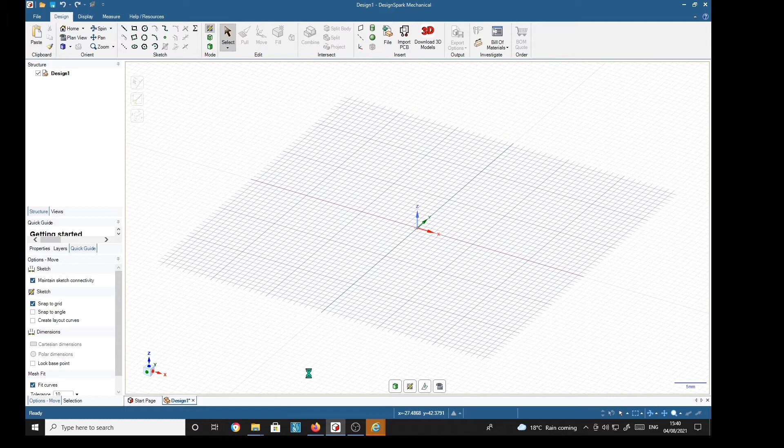The first part of the x-axis is the subassembly, and all the parts are here. If we hold down the control key, we can select them all, but we don't select the subassembly itself because that's what we're going to make - it's a sleeper key, low rail, linear mount, and the x-axis rail. And there it is. H key to show them all.

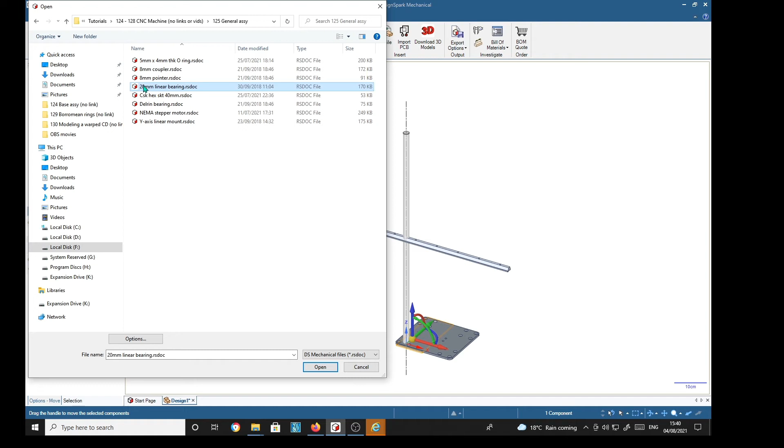Now there is one thing missing, and that is the linear bearing for the rail here. The linear bearing is common to all three axes, so that is located in the general assembly, and there it is, 20mm linear bearing. So we're going to load that. Also, there it is, linear bearing.

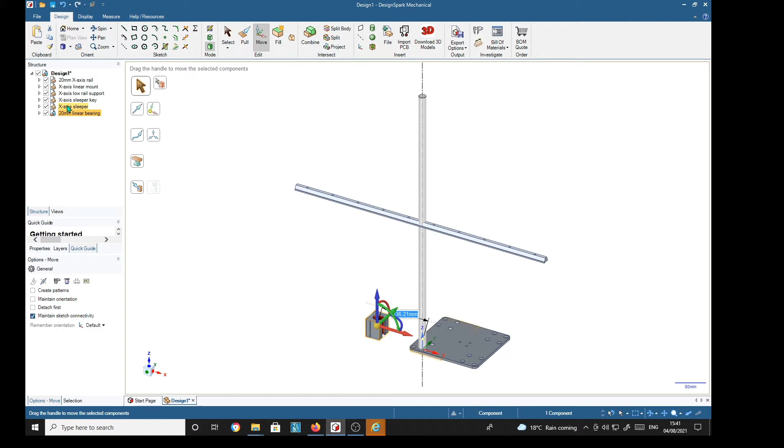Now we have everything we need. I'm going to move them separate from each other. There's the x-axis sleeper buried in there somewhere. We'll move it out. Sleeper key, that is again buried somewhere. There it is.

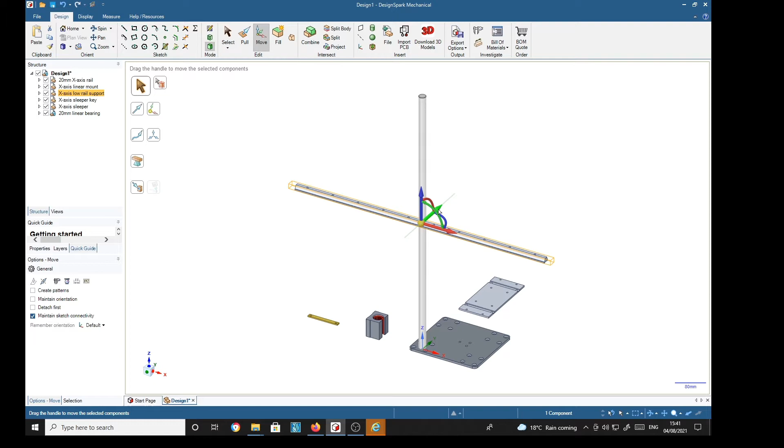Low rail support. Linear mount down here. And the x-axis rail, which is in the wrong orientation, so we'll change that - move that to 90 degrees. Right now we've got all our parts clearly to be seen.

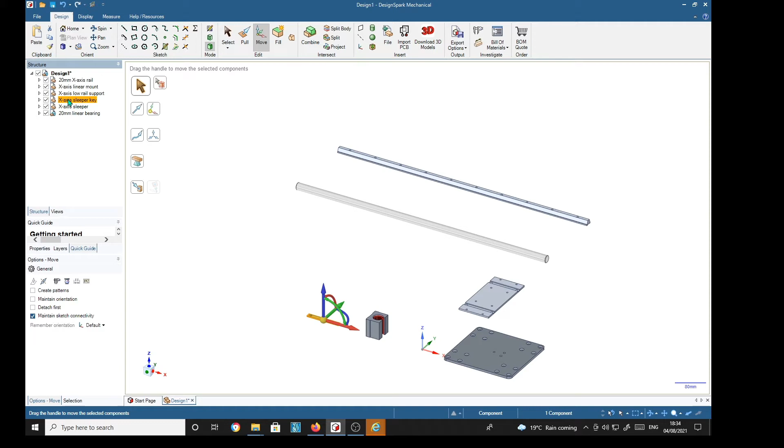Now that we've got all the parts, we're going to assemble them. First thing we're going to do is put one of these keys into a slot over here. So hover on there, we'll see that it's this sleeper key here in the structure tree. So if we zoom in...

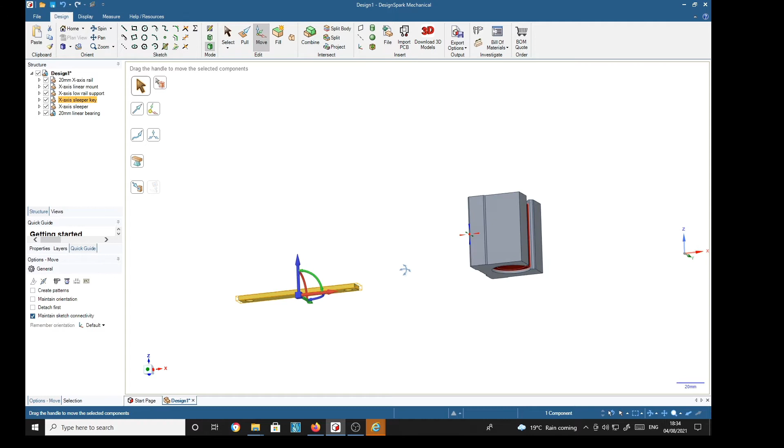The first thing I'm going to do is place the anchor handle on the bottom face. Then we go to the sleeper, choose the up to tool and select this bottom face of the slot. Now I've just clicked, and that will have put the bottom face of the key level with the bottom face of the slot.

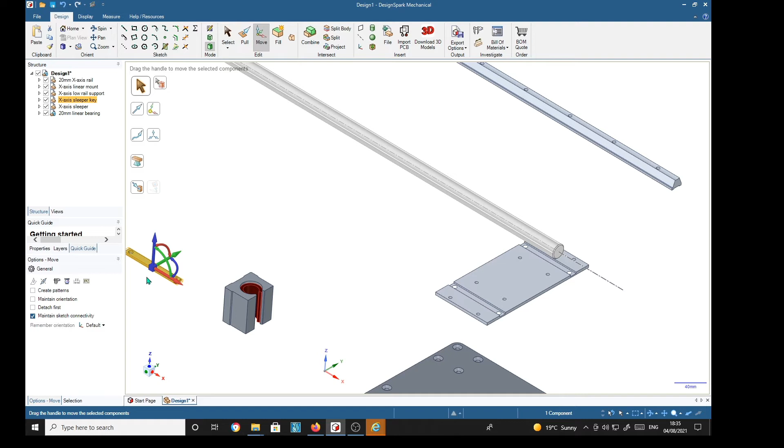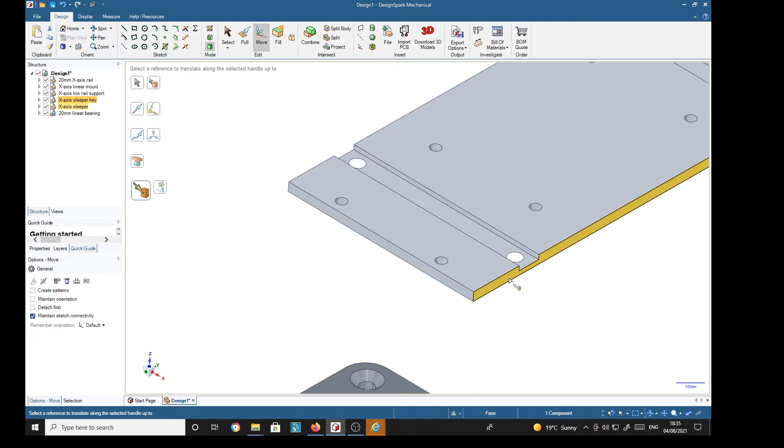Now the next thing I can do is drag the handle to the end. Select the blue arrow and the up to tool. Click on here, and look, it's shifted it right across. So now we've got the bottom face level with the bottom of the slot, and the end level with the edge of the sleeper.

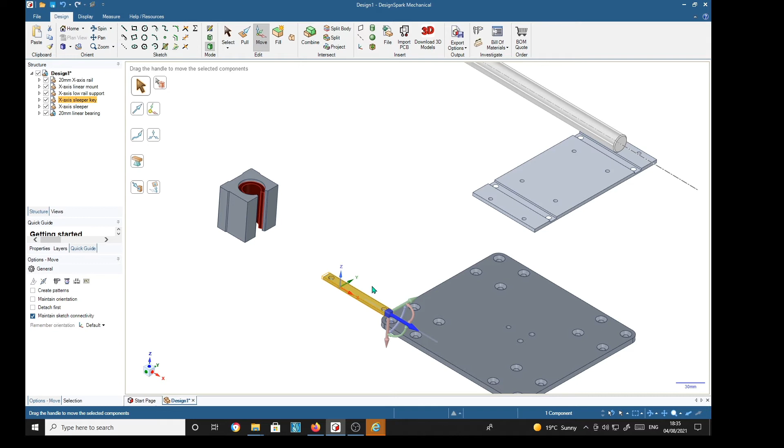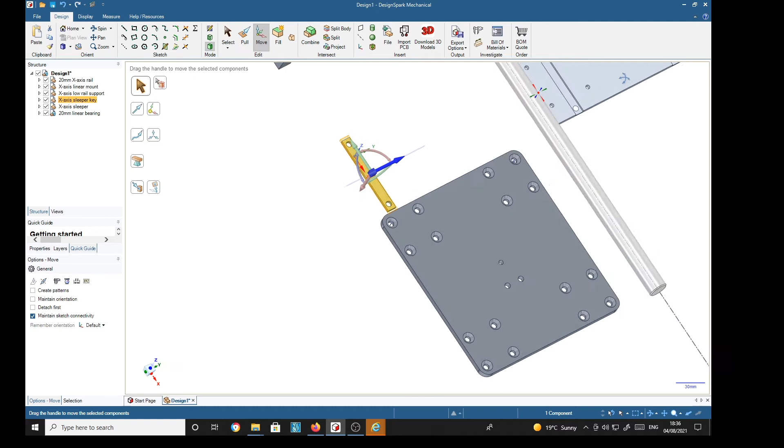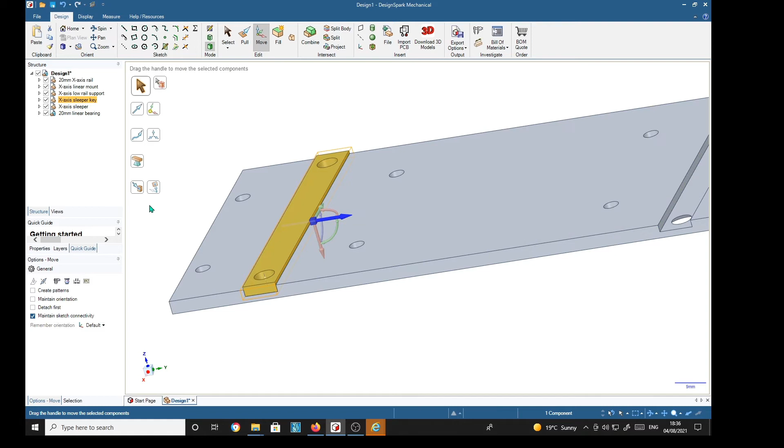Now all we have to do is place the hub on this face there, select the blue, and up to this face here, and there it is, perfectly fitted into the slot. Now we've got one in while its anchor is on that edge. We can select it, select the up to tool, hold the control key down and select this inside edge, and we get another one fitted into the other slot.

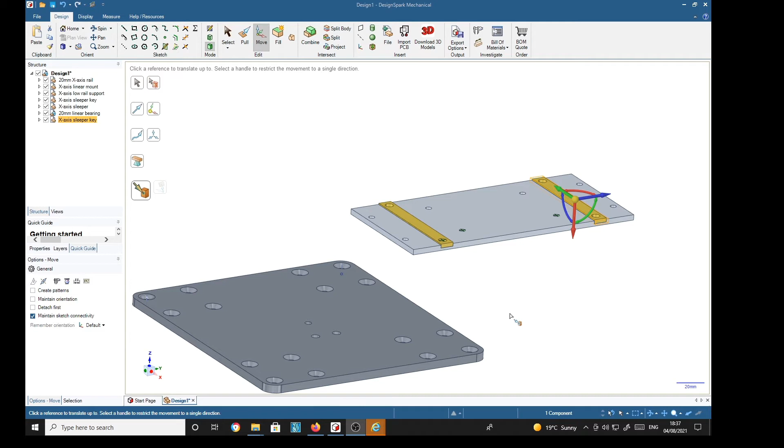The next part of the procedure is to assemble the low rail onto these keys. You see that there's a slot in the underside of the rail which fits exactly over the key.

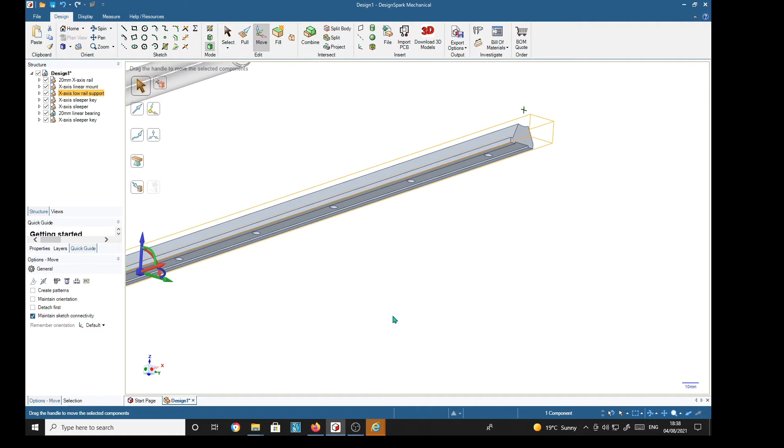So the first thing we'll do to achieve this is select this low rail which goes over there and drag the hub onto the underface there. Select the blue arrow, up to...

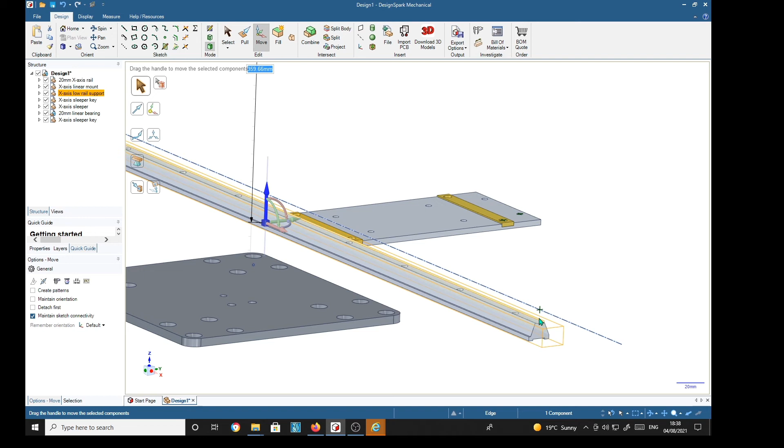Now that's put the underface there level with that one, that face. Now the next action is going to be to align this end hole with that end hole there. Now we can't really do it very well on the top because of this curve, so I'm going to turn it over, move the hub to that hole there, and it's in the middle.

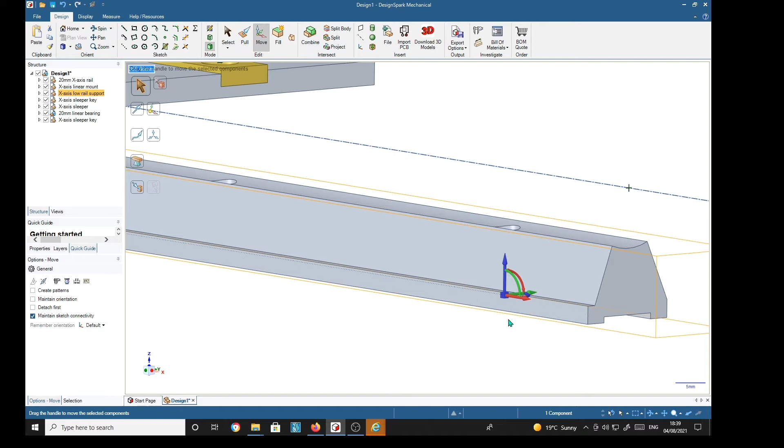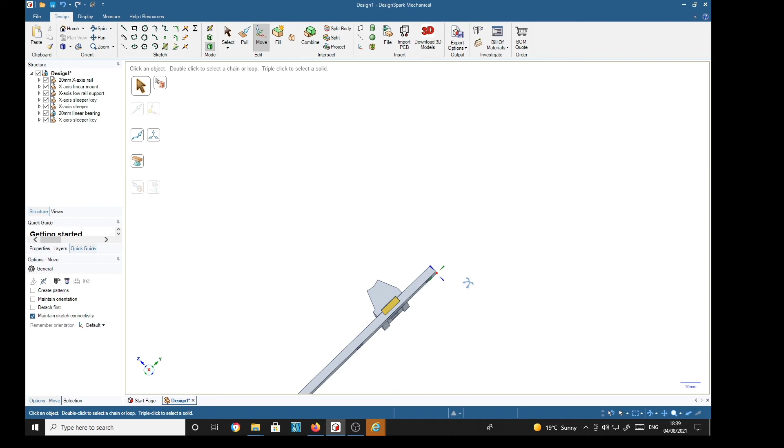Select the red arrow, up to there, and there it is, aligned on the key. And it's perfectly in line with the hole.

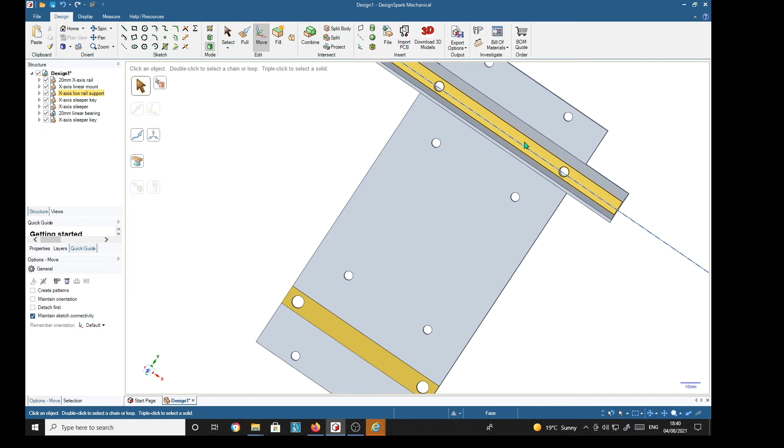Now that we've got one low rail accurately placed, we can easily make another. So we'll drag this... where are we?

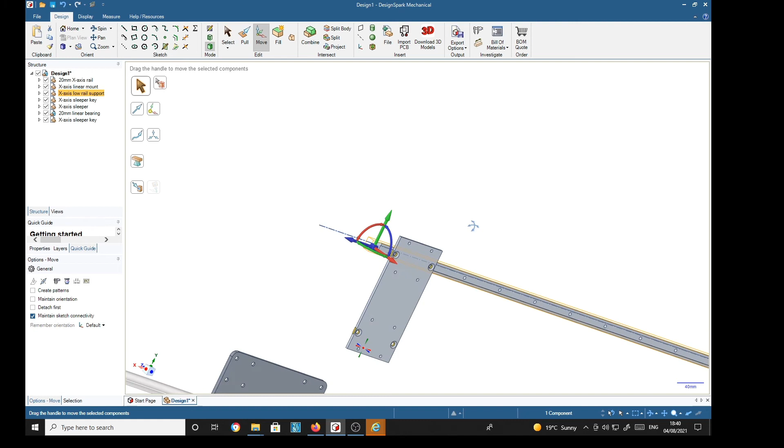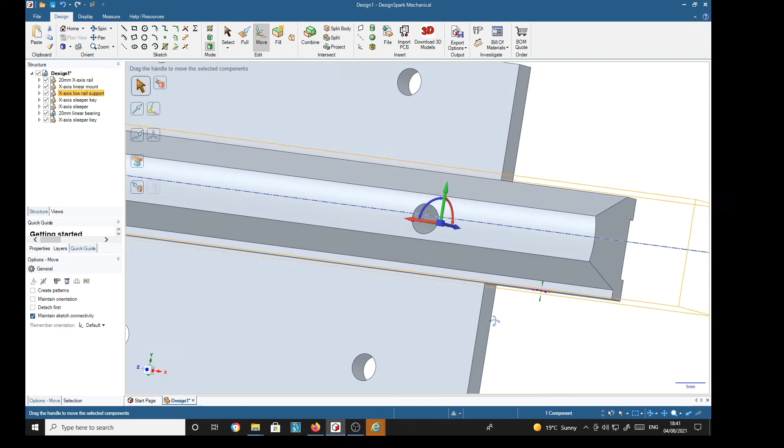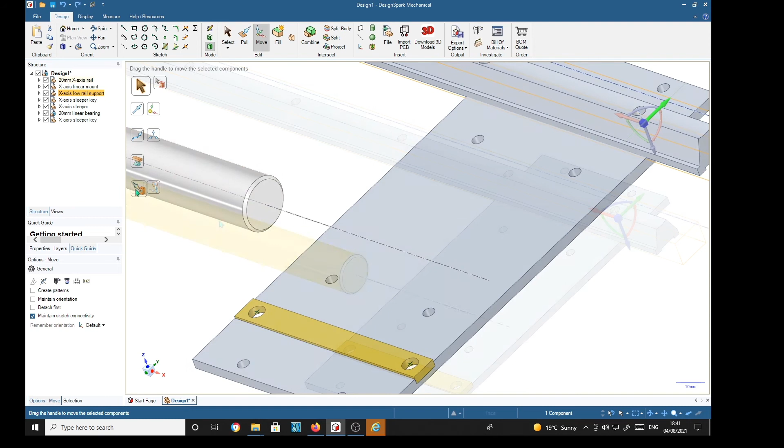Right, now we've put the anchor on the center line of one of the holes. It's inside the low rail, but we can still accurately move it by selecting the green arrow, then hold the control key, select the inside of the hole, and there we are, we've got two rails on.

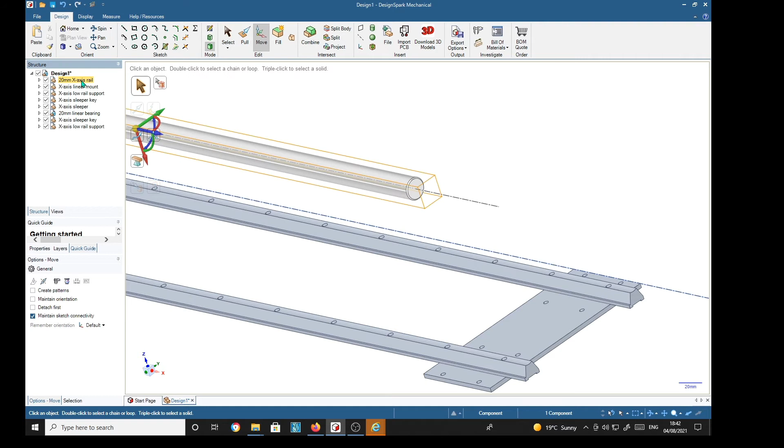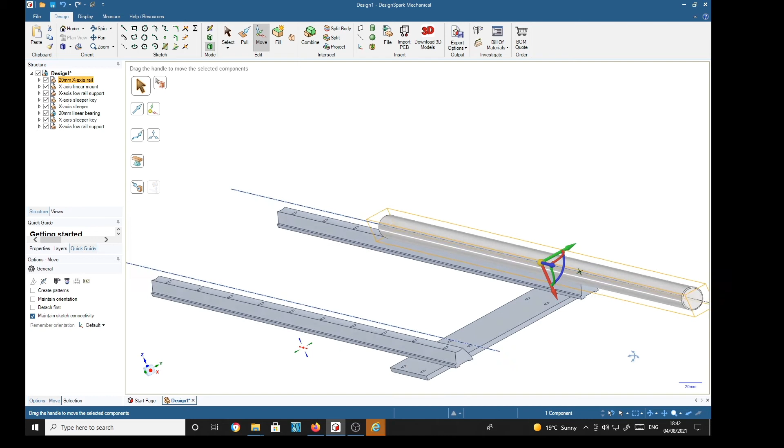Now we can move the x-axis rail. We've selected the outside surface, so that means we're on the axis, the center line of the rod. We're going to go up to the center line of this curve, so we can select that, and it's nicely on the low rail.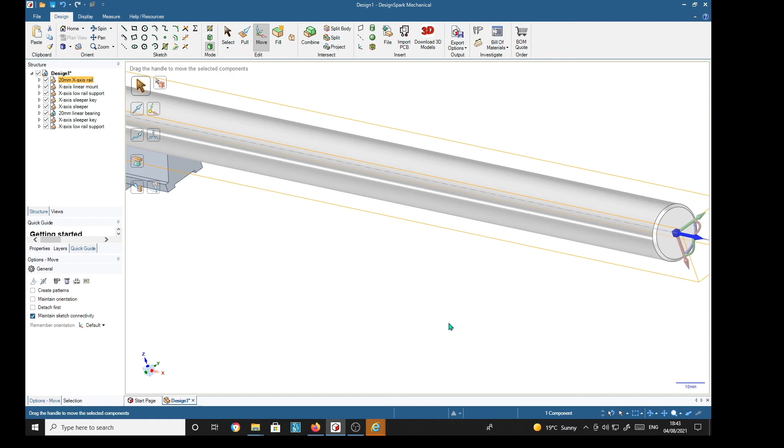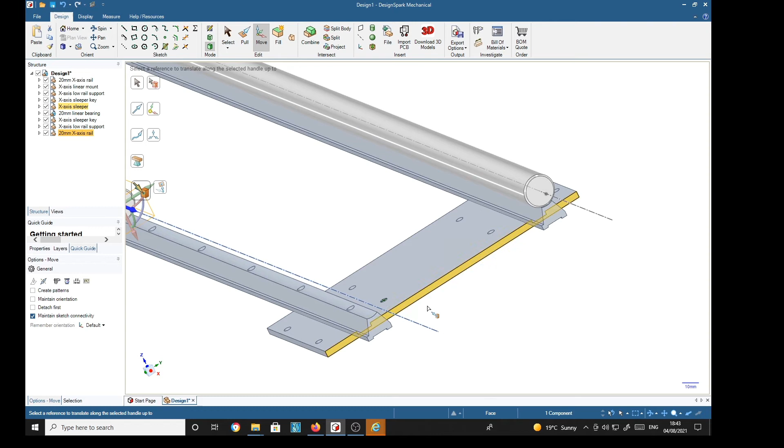Select it again, move it to the end face, blue arrow up to, and now we can go up to, hold the control key, this curved face, click. Oh, what happened? It moved the center to there, so select, whoops.

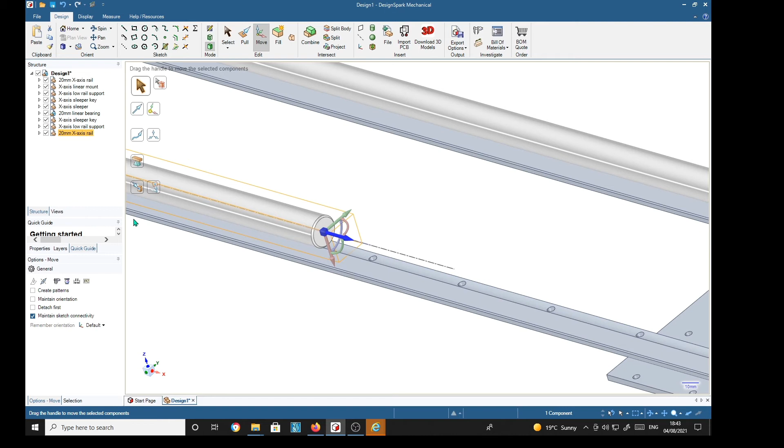Put that on the end, select the blue arrow, up to, and now we've got those rails and supports added.

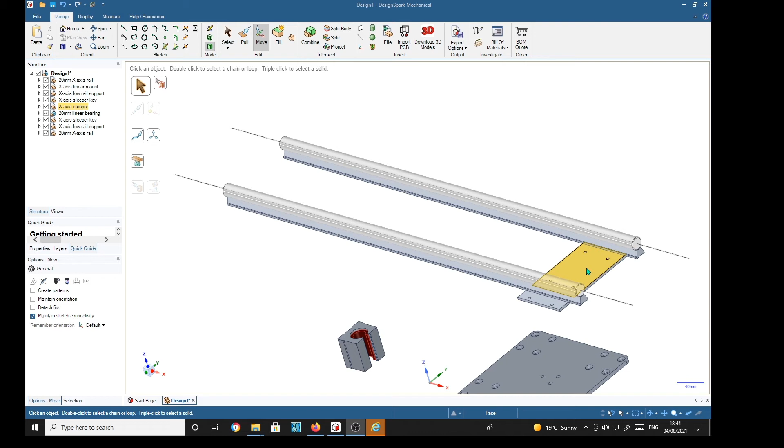Now we need 4 more of these plates, x-axis sleepers I call them. So I'm going to add them with the pattern along here. So we'll select that one, sleeper, we'll select create patterns, and up to.

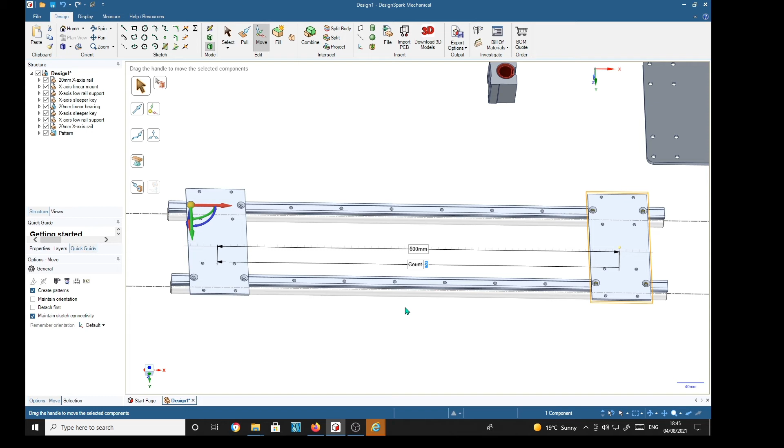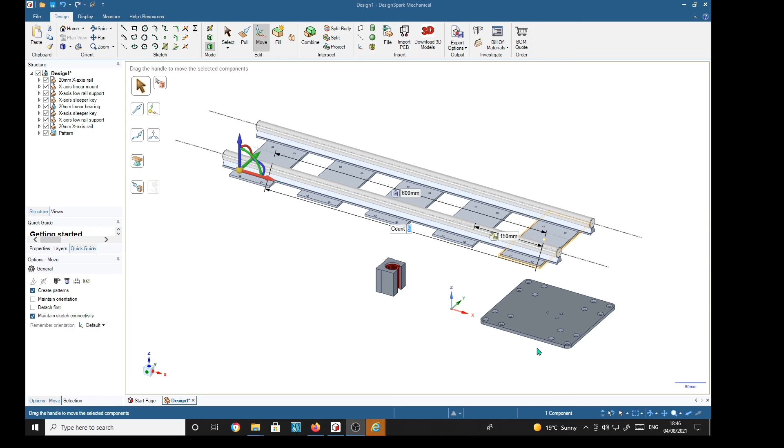Now we need to assemble 4 of these on this plate, on the underside of the plate. I'm going to turn that upside down. This is in the wrong orientation, so I'm going to choose it. I'm going to rotate it 90.

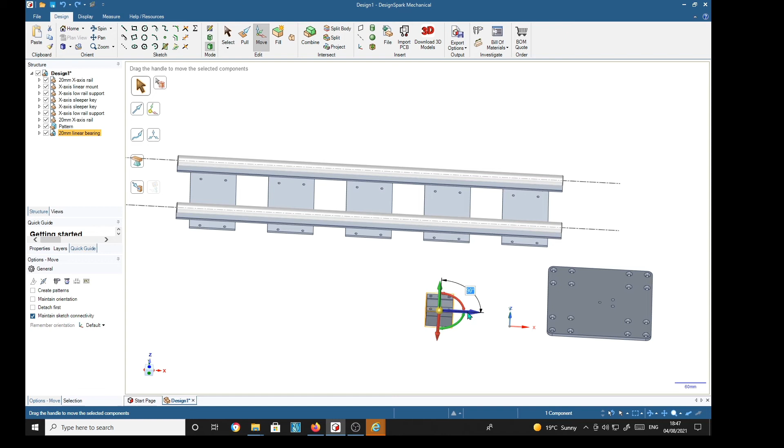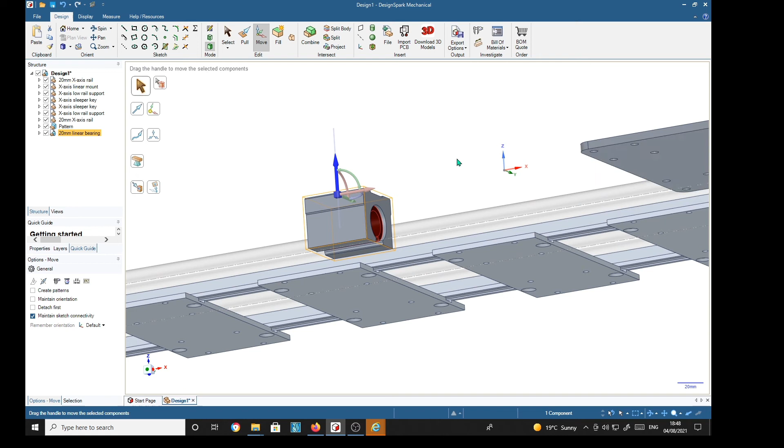And pop that on top of the bearing. Select the blue up to there, so that's put that top level with the underside of the linear mount.

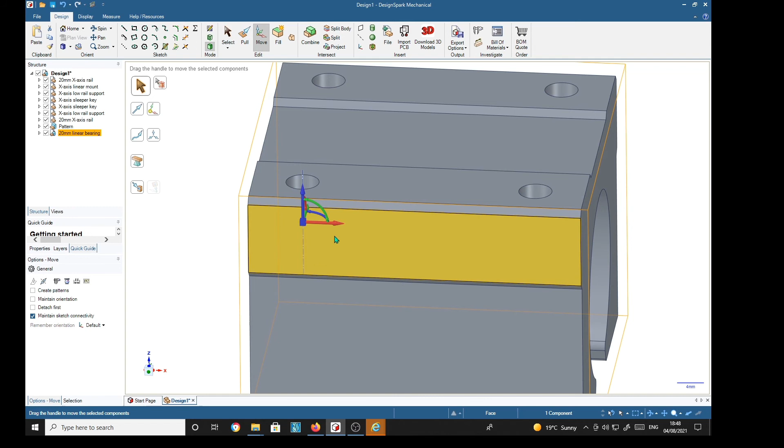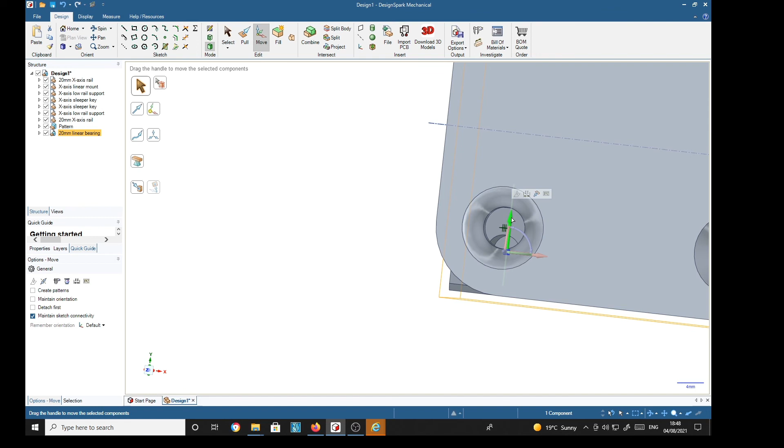Then we'll put the hub into the center of that hole there, corner hole, and up to, that's it.

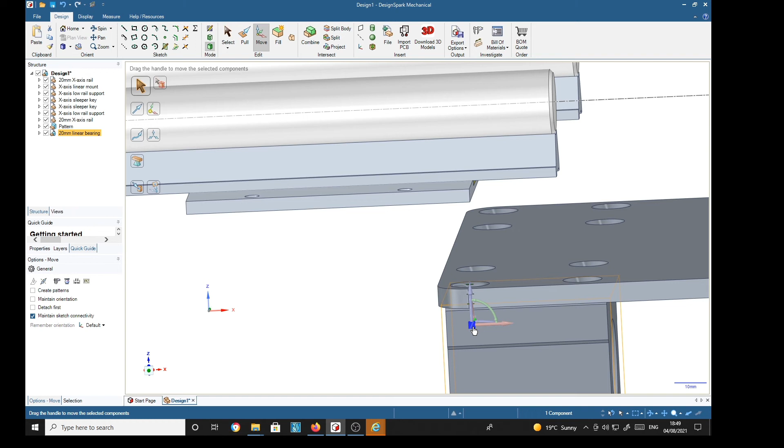Now that we've got one in there with this anchor in the center of that fixing hole, we can duplicate it by going up to control key, select that, and there we've got 2.

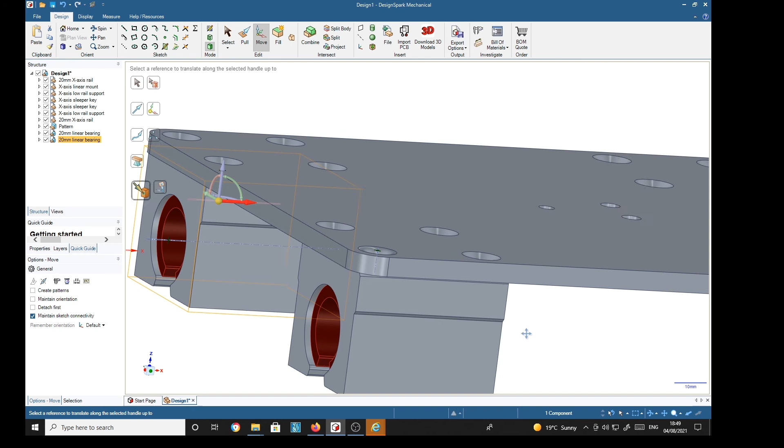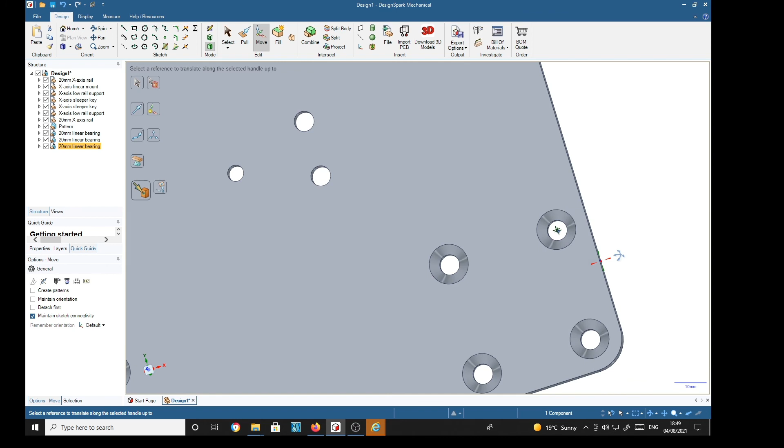Then we can do the same thing, select that one, up to, control key, click, there's another one. Click the green arrow, then up to, control, click.

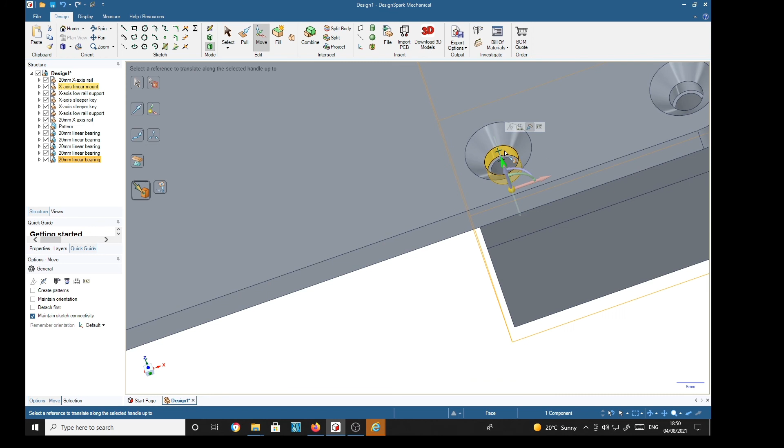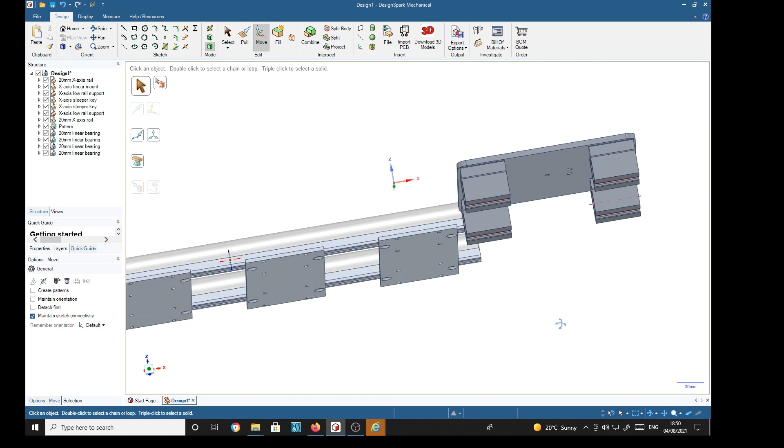Now I chose the wrong hole to go to, so we'll do that again. This time, right. Got an extra one, that one, so I can right click that one and delete it. So there is our linear mount with the 4 linear bearings.

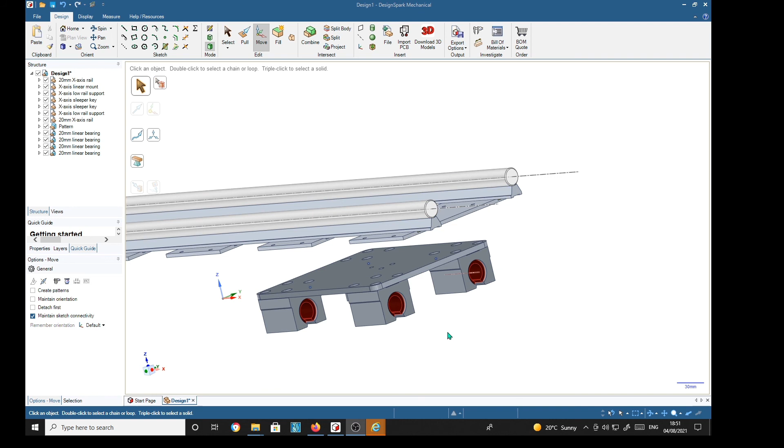The next job is to locate this precisely on the shafts, and if all the measurements are correct, it'll line up perfectly. So we've got to capture the whole thing. We'll go into select, S for select, capture it all, there we are.

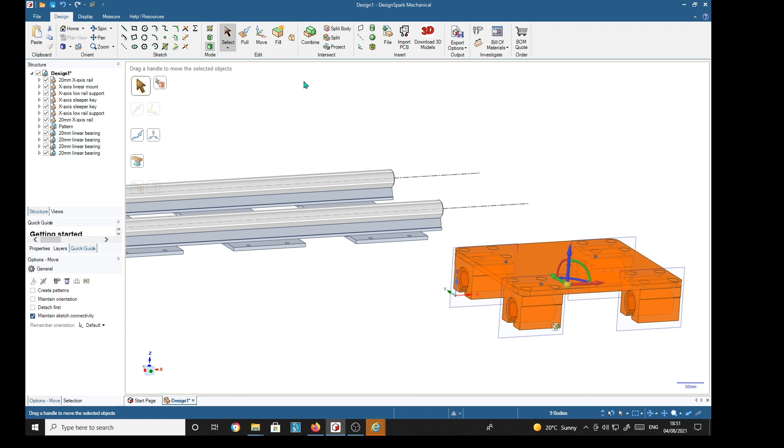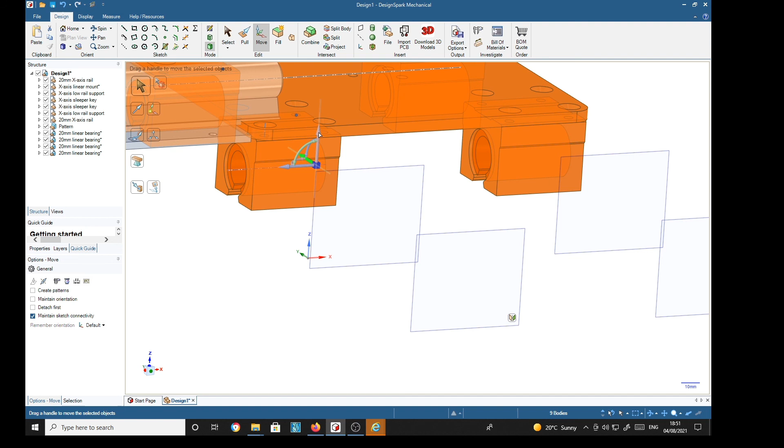Then we want the move tool, move it, move the hub to the inside of this bore, select the green, and move up to the shaft. Then the red one up to this shaft again, and we should now have this exactly on the shafts.

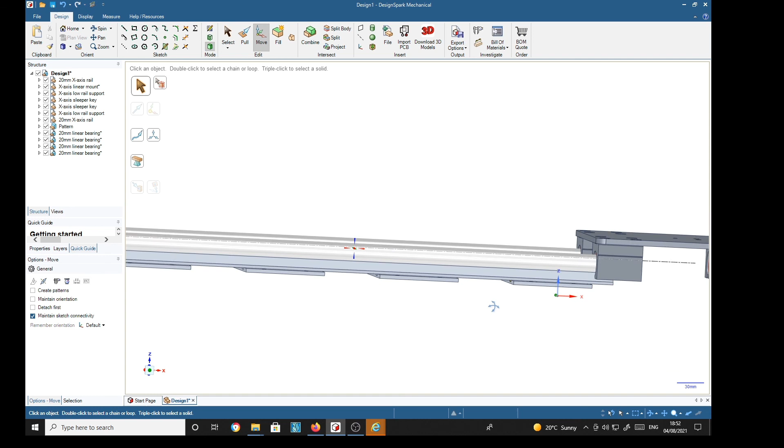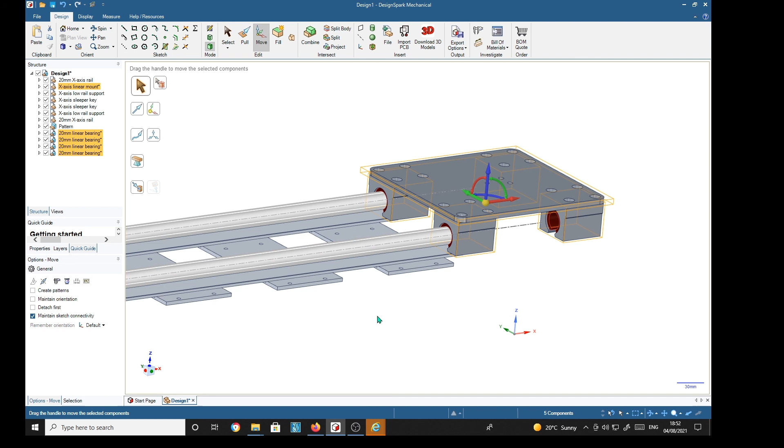It's not quite all on, so I would capture the whole lot again. Hopefully we won't capture anything we don't need to. It appears we have. So we want the linear mount, and we want the 4 linear bearings. Control click, 1, 2, 3, 4. Now we've got the whole thing captured, 4 linear bearings and the linear mount. There's nothing else in this part.

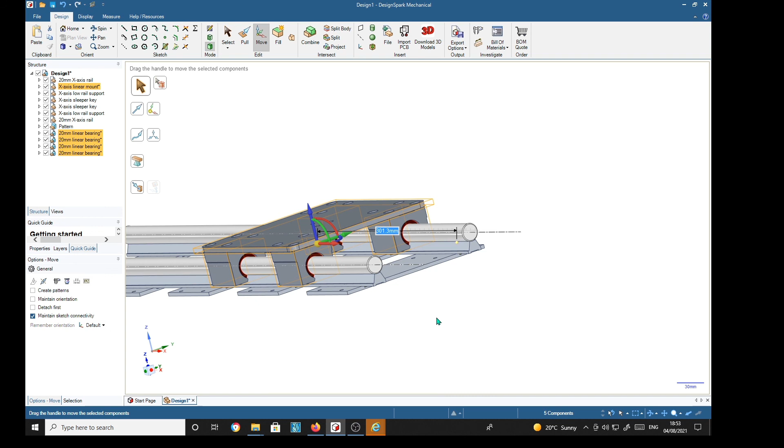Now we should be able to move it all along, slide it along onto the... there you are. How smooth is that? There you go, that's the sub-assembly made.